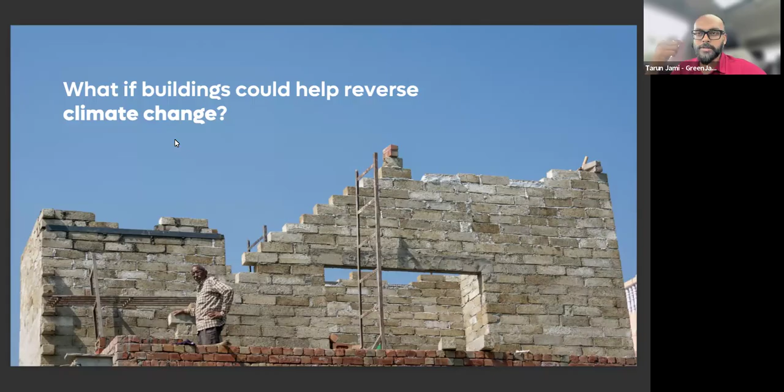So fundamentally, the question that we're trying to answer at GreenJams is, what if buildings could help reverse climate change without burning a hole in the pocket? And the answer to that is agrocrete.

It's the world's first verified carbon negative bioconcrete, which is made using crop residues like rice straw, wheat straw, bagasse, cotton stalks, corn stalks, and so on, and byproducts from the steel, power, construction, mining, ceramics, and a few other industries. We don't use any cement, and our innovation lies in converting conventional, majorly available crop residues into strong carbon negative concrete products.

Agrocrete is patented in India, UK, South Africa, Thailand, and a few other international countries across the world. The product has been tested and certified by the Central Building Research Institute in Roorkee, ratified by BMTPC, and our claim of carbon negative is third-party verified and validated on the international EPD system.

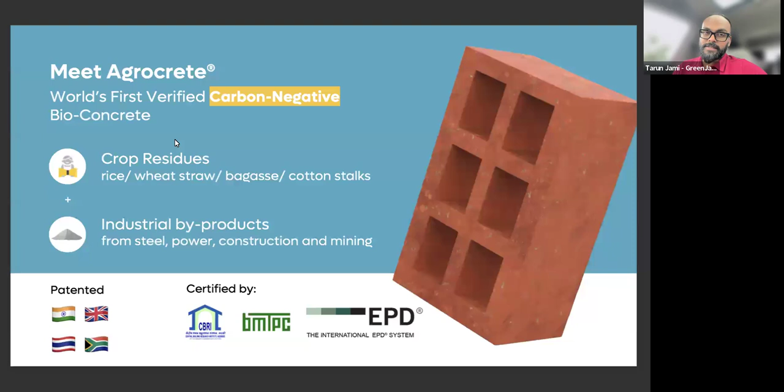So at this current point, we're actually trying to build an ecosystem of carbon capture using agrocrete, and the fundamental raw material that we use to make agrocrete happen is the crop residues.

We started with the bricks and blocks. We're soon getting into 3D printing, precast, ready-mix concrete, and so on. So what we're essentially trying to scale up at this point are the bricks and blocks business.

To essentially sum up all the numbers that you see on the screen, what I'm trying to say is agrocrete is stronger than conventional bricks, has a long life, has very little water absorption, which means that you don't see any dampness in the walls. And the U value, which is the thermal insulation of the material, is best in class.

And the embodied carbon is in the negative values, which means that by leveraging the carbon that has been captured by the crop residues, we're able to sequester more carbon in agrocrete than we're emitting during the entire manufacturing process, which makes it carbon negative.

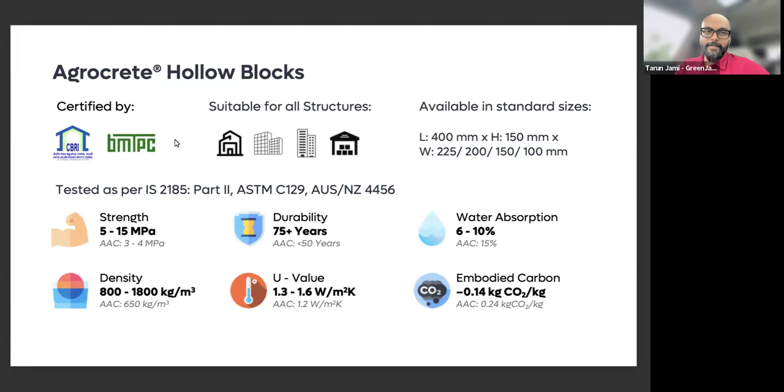So what we're essentially helping our customers achieve is up to 50% reduction in wall making cost and a 3.5 times higher thermal insulation, all while giving them an opportunity to make buildings carbon negative.

So this is how our theory of change works. For every 300,000 square feet or 3 lakh square feet of construction, we're able to sequester almost 1,000 metric tons of CO2 and prevent an additional 3,500 metric tons of CO2 emissions by replacing conventional materials.

On top of that, our customers save significant costs, while also being able to prevent over 1,200 metric tons of crop residues or stubble from being burnt.

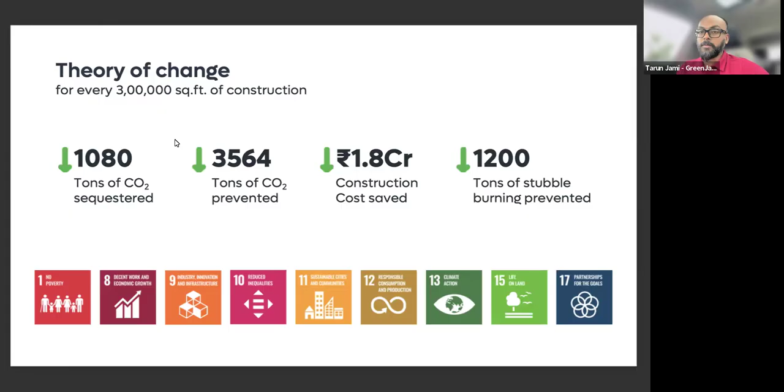So these are some highlights of some of the few projects that we've completed in the past. On the top left corner, you would see a building which is built in Vizag, where we have been able to demonstrate 60% reduction in energy consumption.

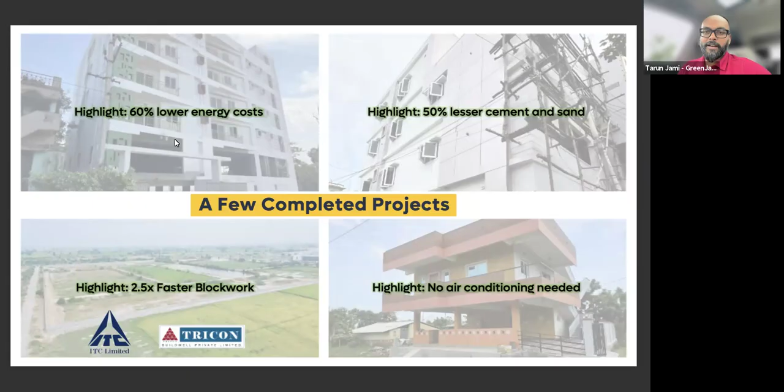On the bottom right corner, you would see another house built in Vizag where there is no air conditioning needed. I would like to repeat, in Vizag, where there's no air conditioning needed, this is a hot and humid region. Every house in Visakhapatnam tends to install air conditioning because of how hot it gets.

And similarly, we've built projects across the country. We have one project in the Himalayas, one in Goa, and one more in the southern part of India, including Rajahmundry, Chennai, and so on.

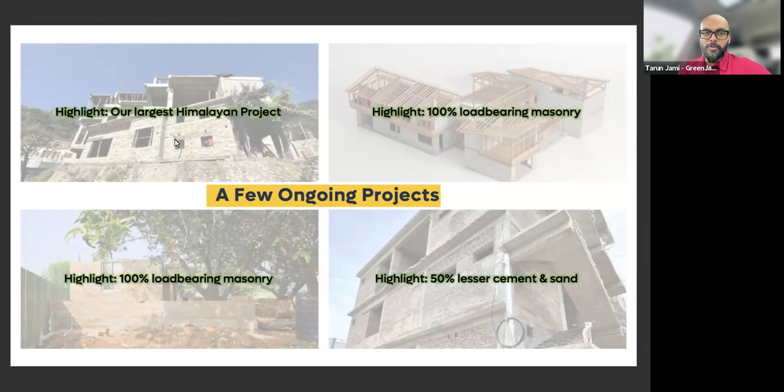So how we plan to scale up is through partnerships. And I think that would be a point of interest here with this particular audience, which is that we're trying to build a decentralized hub and spoke operations model where we partner with individuals to set up manufacturing units in locations that we have identified. And it's the partner who essentially helps procure the crop residues.

We support in making the relevant connections, but then we find local entrepreneurs who will go about doing aggregation and collection of crop residues from farmlands in their particular region. We also help in procuring the filler materials, which include byproducts like construction demolition waste, soil excavated from construction sites, and so on. Most importantly, in concrete, the most important raw material is always the cement.

In the case of conventional cement, crop residues are not compatible, which means we had to go out and invent our own alternative to cement. We call this BINDR, and it's something we manufacture in-house. We support the partner in doing the manufacturing operations through our own teams who go to the manufacturing units and support in upskilling and training of the workers there.

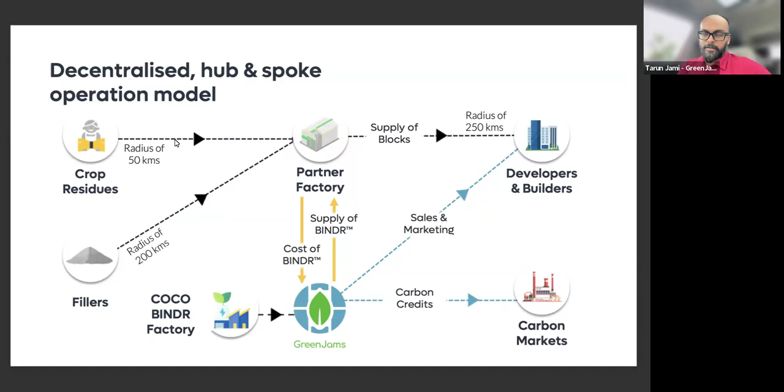They produce the products according to our SOPs and internal standards, and we take care of the market access. So we do the sales and marketing, we do the market development, and ensure that the product being manufactured by the partner is being taken by the customers. So we are a pretty well-rounded team.

I am Tarun. I am the founder and CEO. I also invented the product. I come from 10 years of deep tech experience in the space of bioconcretes, and I have a PhD in civil engineering.

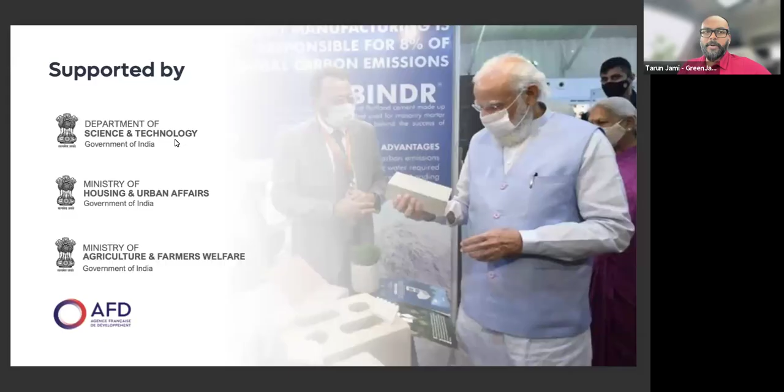And then there is Mr. Jalen Murthy, who serves the company as its managing director. He's also an industry veteran with more than 37 years of experience, and has built over $1 billion worth of construction. He was supported by a robust head of growth and a product stewardship lead who also come from within the industry. I'm also happy to report that we've been supported immensely by the government of India through various grants and non-grant initiatives. We've also been recognized by several non-governmental institutes and international organizations from across the world who have supported us as we scaled up this company.